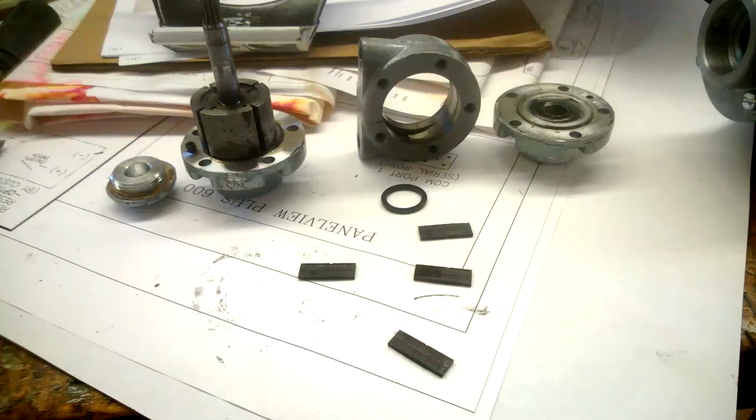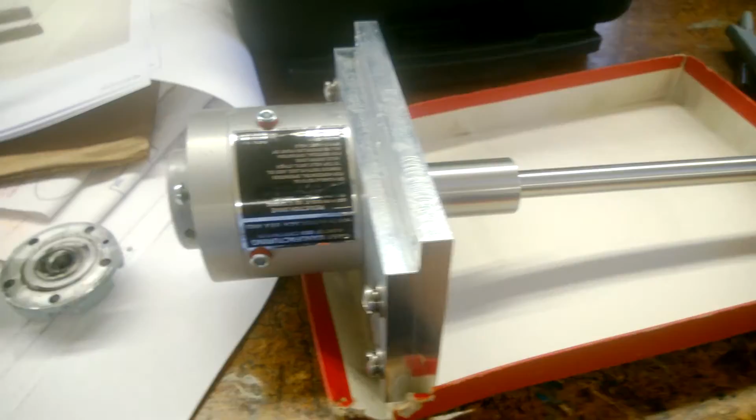Okay, I'm making a video here dealing with an air mixer that was sent back to us, a gear reduction air mixer with the air motor. The air motor stopped working for this particular customer, and this has happened several times for this one customer. So I've dismantled the air motor, and we're going to go through a number of pieces here.

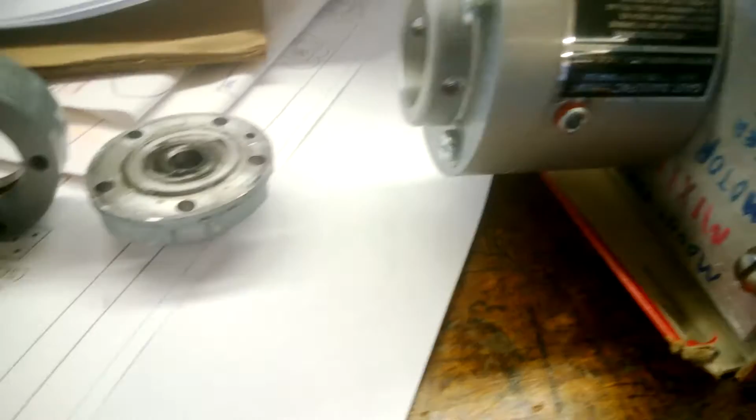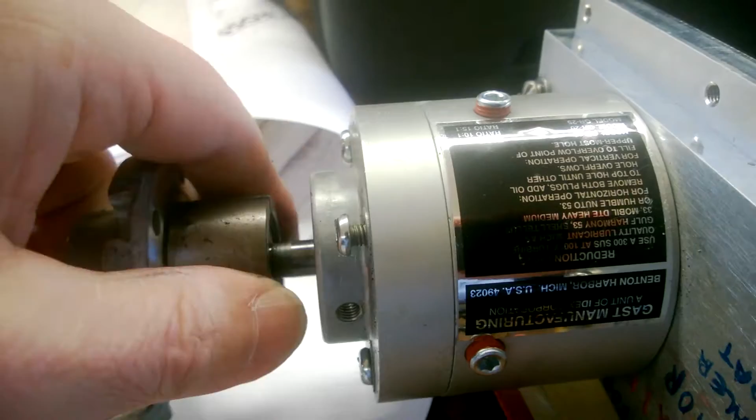This is the gear reducer. I can insert this air motor shaft into the gear reducer, and I can engage the gear shaft, and I can turn it, and I can make the impeller turn down there. So I know that this part here is okay.

So I took this all apart. This is the air motor. This is the part that goes in here, and it gets held by set screws in here. This is the actual motor that turns. This is the housing that goes around this.

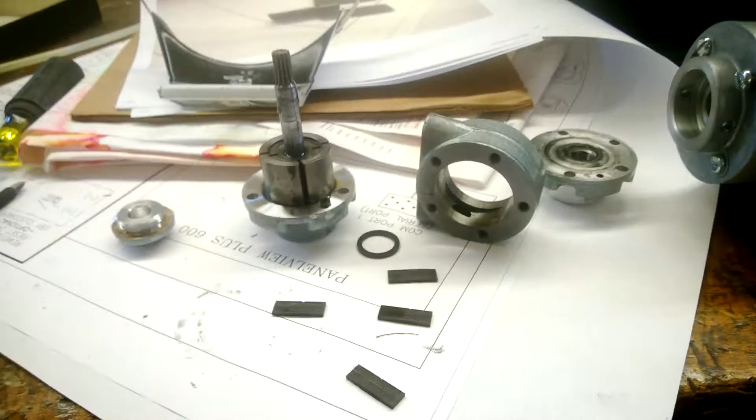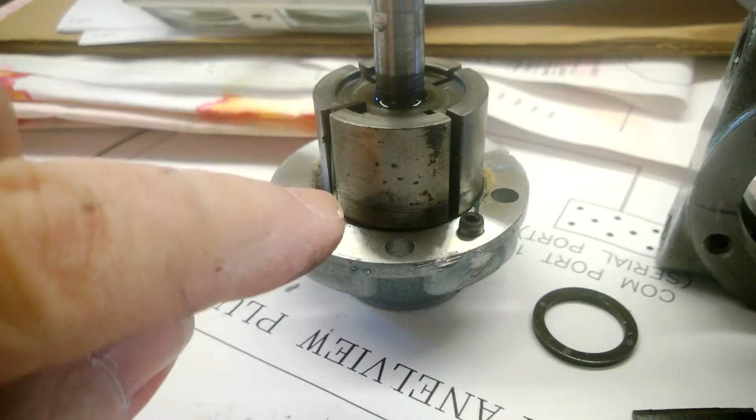Now what I'm looking for here is I'm asking myself, is this getting lubrication or is it getting dry air? Because air motors have these wipers, and these wipers go in these slots. And the slots rub along the outside of this and the inside of this and the edge of that. If you aren't getting good lubrication in here, you're going to have a problem with the motor. You can have stalling problems and failure to operate problems.

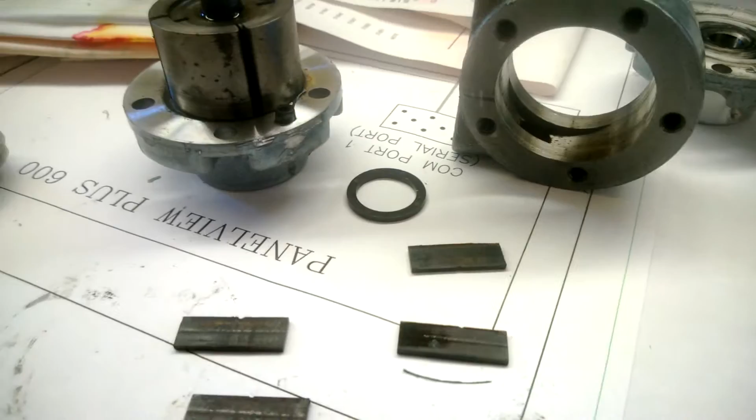Well, several things. I took it apart and I found this piece of metal right here. It may not focus in this camera, but there's a sliver of metal that came out of there. I also noticed that all four of these blades are dry.

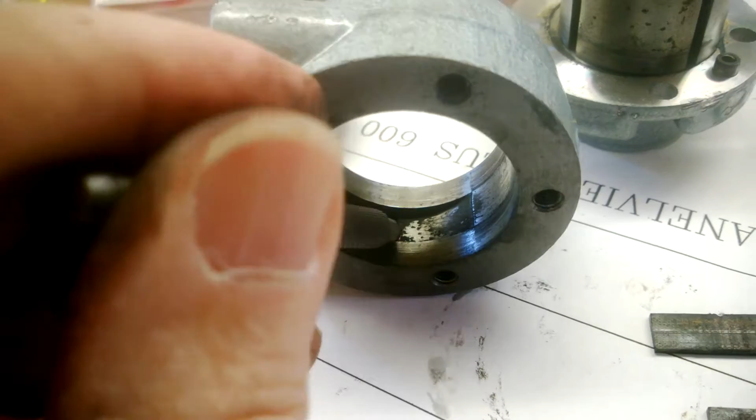I then look in this housing in here, I have this part where the air goes out, and I rubbed in there. What I found was dry carbon, dry metal, like steel. It kind of comes off dry. You can see a little bit there, and I can wipe it on the paper.

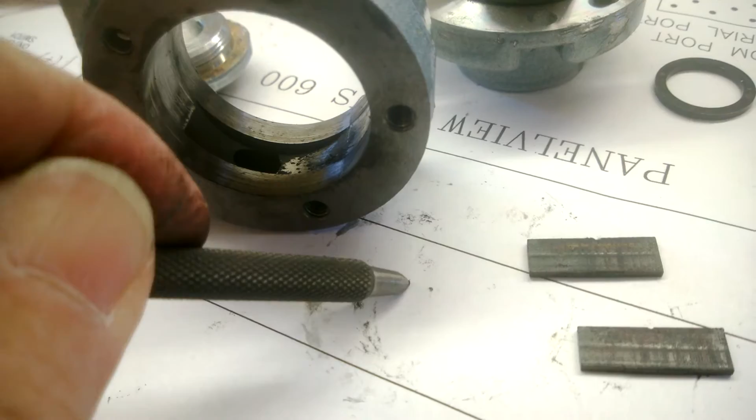I also noticed that these are worn. They wear there, and not so much there, and they wear there, which means they're wearing along this surface. So there's some kind of dust being created.

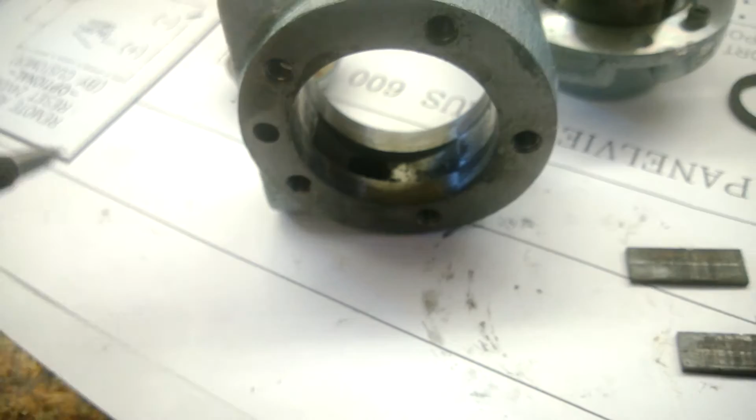Where the air goes into this, it looks clean, except the camera may not show you this pitting going on. Well, this is a steel housing, and this pitting implies there's water getting in here, because water would corrode steel.

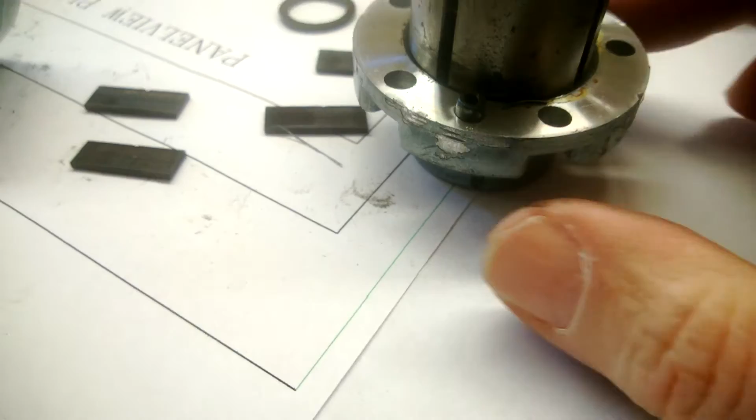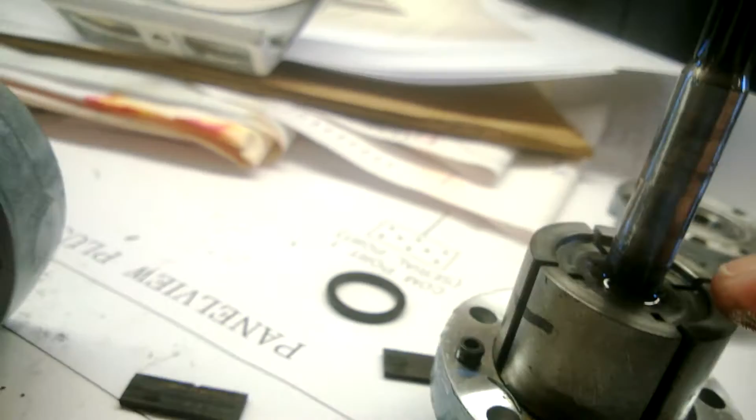I look at this piece here, the actual rotating part, and I can see there are some water stains. Like right there, there's a water stain. As I go around, I'm getting water stains. I also notice that this whole surface is dry, it's not moist, which oil would be on it. Like this oil up top is oil draining down from this housing up here, that's full of oil. That's what this is for.

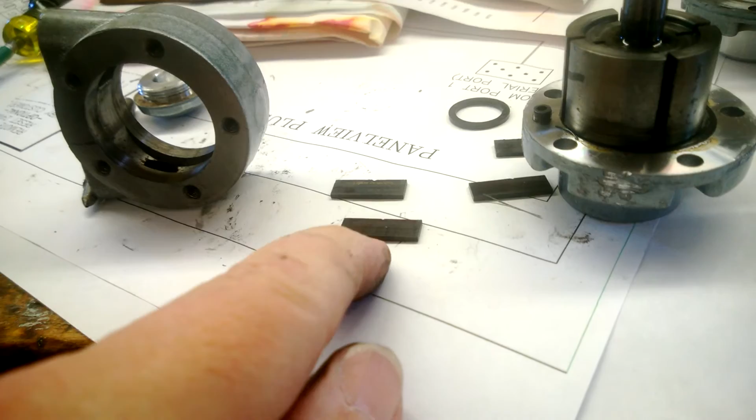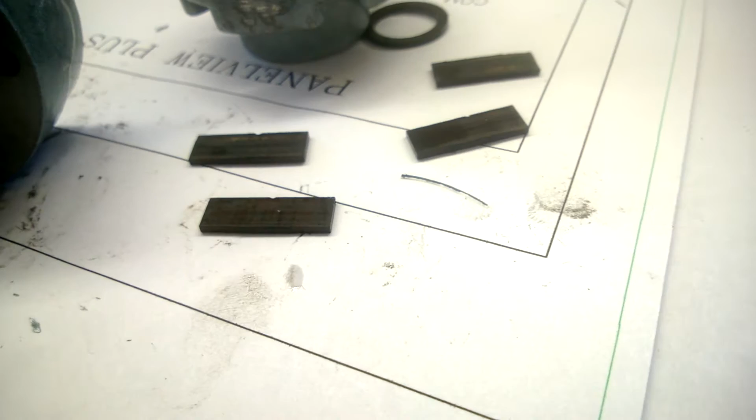So the failure of this motor appears to be due to moisture and/or lack of oil. These motors are wear parts by nature because these air vanes wear out by nature, and we actually have a shred of metal, and I cannot tell you it came off of this one of these or not. I just can't see that fine to say where it came from, but it did come out of this when I took it apart.

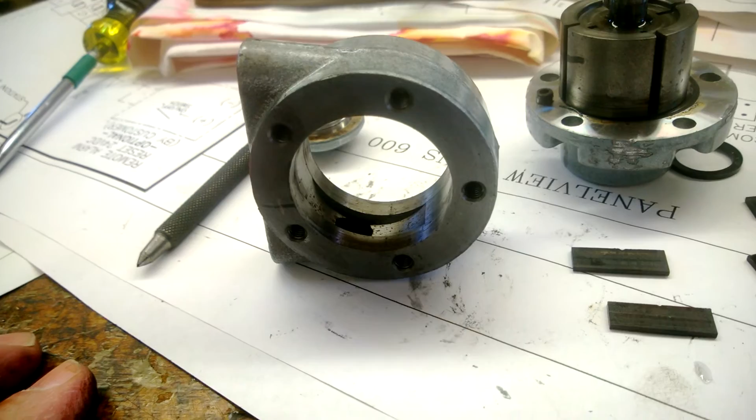So this is a brief story about air motors, and when an air motor is properly lubricated, you may have extra oil spitting out of the outlet. Depending on your installation, you might not want that oil coming out of the outlet because it can make a mess on the surrounding area. So oftentimes people choke back on the oil, and it just eventually the motor, in essence, burns up.

It wears out. So if you're working in a somewhat clean environment, but you want this to operate, you either want to pipe the discharge out of the clean area and make sure plenty of oil is going through there with the air, make sure there's no water in there, and things should last a lot longer.

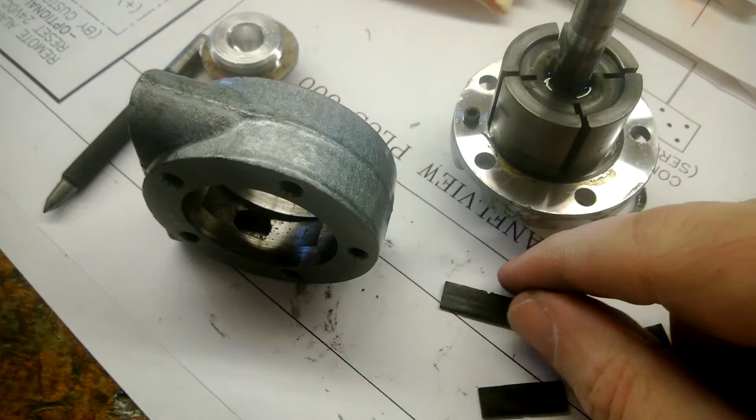There's also, which you may not see, signs of rust on these wear plates. There's rust right there. There's rust right there. And there's rust right there. This rust says to me that the motor was working, but it wore out. So it's possible to buy just the motor assembly to put on top of the mixer assembly.